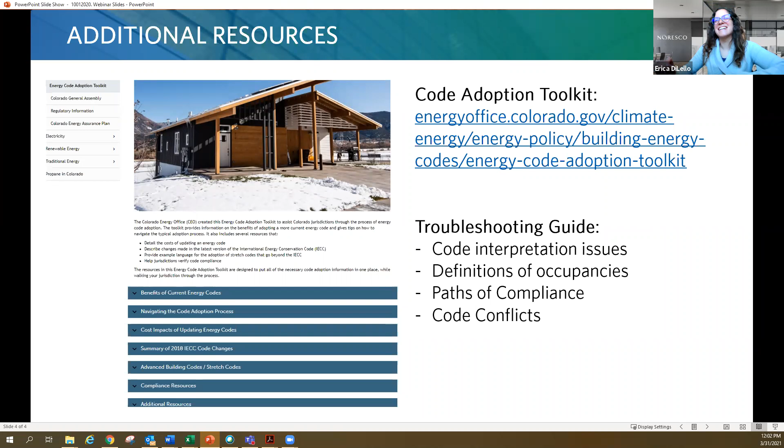All right, that sounds good. Well, welcome everybody, and we're gonna do our level best here to review some reports and all kinds of wonderful stuff that deals with energy. As Erica said, we can answer questions anytime. Pretty laid back here today. I'm going to be looking at several different reports and having some fun. So whatever it is you want to ask, please do.

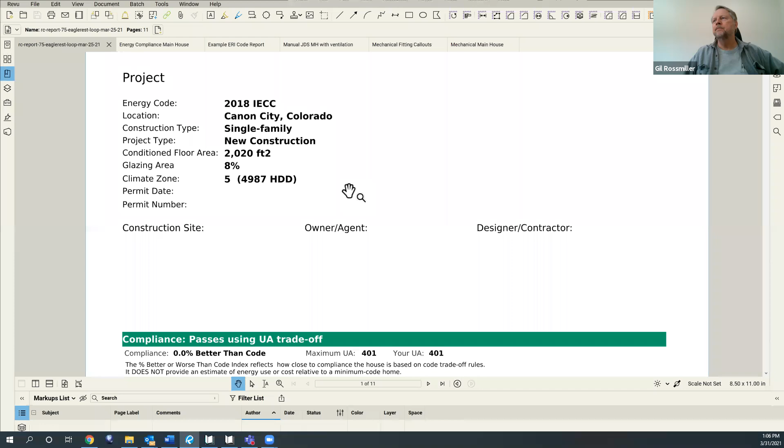These are all, yeah, what is the zone? Well, let's see. I didn't blank out the, I guess I did. Some of these I didn't blank out, keep the innocent nameless or whatever they call it. So climate zone 5. This was down there in Canon City, and this is 2018. So a lot of you come up with it, right? So Kristen's like, ceiling value not enough for climate 7. Well, that's the beauty of it. Great comments. These are really, really good. We'll look at all of that stuff, okay?

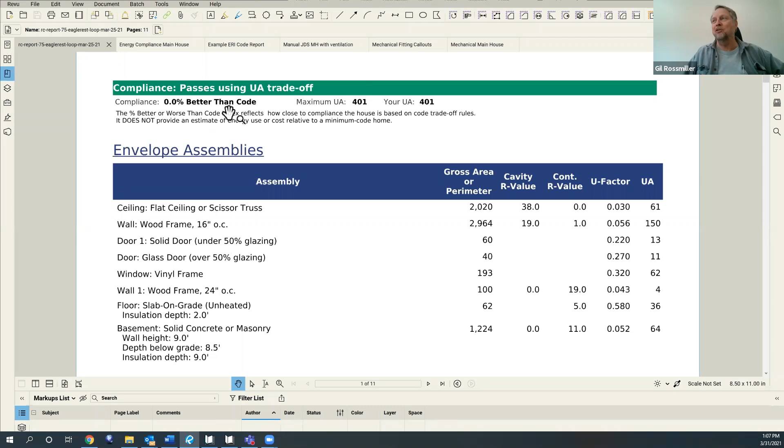So the first thing we have to understand, yeah, Tim is like, compliance better than code. We'll start at the very top. Tim, that's absolutely correct. So it says 0% better than code. This is why it's a good one, because it's got a lot of good stuff on it, and it's small, it's not that big. You will pass as long as your UA is the same or less than what we call the reference house.

Okay, so in this particular case, this is what we look at. It says maximum UA, so that would be if I built a prescriptive house, right off the tables, my UA would be 401. What they did in their design, how I'm going to build this building, they came up with 401, pass. It just can't be more than 401. It could be exactly the same. I know, isn't this great? This is a good one.

So then we start to look at the assemblies and what's going on here, okay? Well, let's look at the ceiling. Now, we had a couple of comments that said, hey, this will never make it in climate zone 7. No, the beauty of it is it might work if they had really good walls or really good windows or had floors that were exposed with really good insulation in there. So what you want to get in the mindset of is making sure that what they're showing on their ResCheck is what they're showing on their plans, not necessarily does it meet the R value prescriptive table, because it may not, which is why they're using the ResCheck so they can trade the stuff off, which is perfectly legal, right?

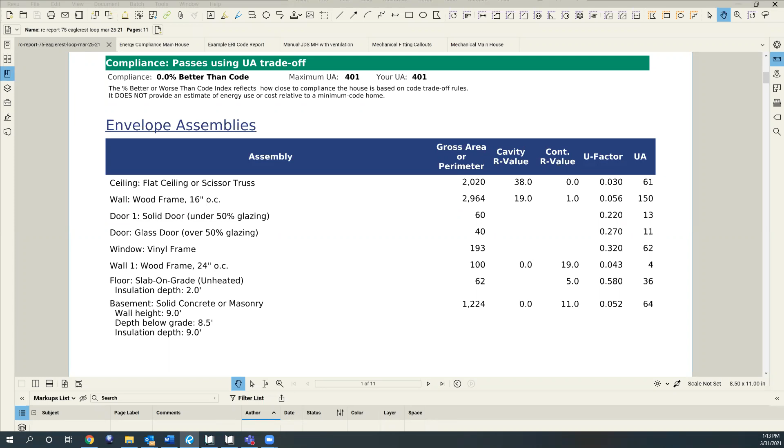But Cornelia, you got your hand? Would you want to say something? I don't know. Can I make it talk, or I don't know. Yeah, I can go ahead and allow her to talk. Cornelia, you just need to unmute yourself. I just wrote some questions in the Q&A. Oh, great. Thanks, Cornelia. Yeah, I got it. So we'll talk about that. I have a tendency to start getting, I'll try to keep on track.

So Bill, you're right. Bill says, in my experience, that R1 is cheating. Absolutely correct. Because the software already accounts for the rest of the assembly. And Cornelia, that's exactly correct. We don't put anything here. So what the software is doing within itself, it is already taking into account any other R values that might be part of that wall assembly, the siding, the wood sheathing itself, that the studs are 16 inches on center,

any sheetrock that might add to the R value, any air films. When you start calculating the overall U factor for an assembly, there are what we call air films on the outside and the inside that have a very small R value that you can use. That is all defaulted in the software. The only thing the software doesn't know is what insulation are you putting in the assembly, and is it cavity between the structural members, or is it continuous, okay?

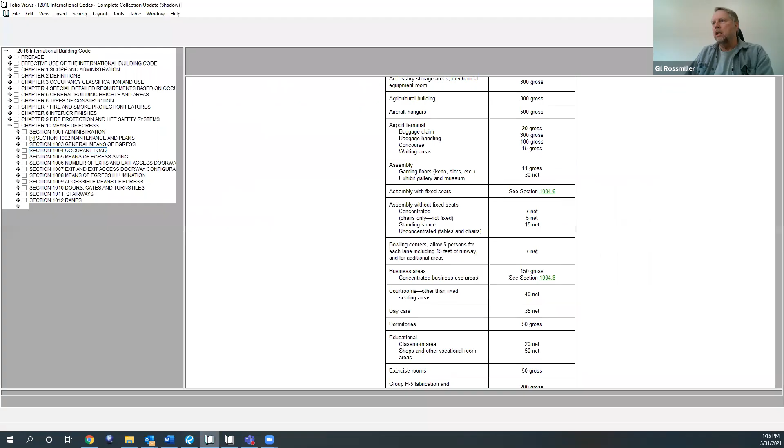So Ryan's put in, could R1 be insulated siding? Yes, it's possible. However, because of the way insulated siding was done, you must then subtract so much. Let's see what that is. I want to say 0.17, something like that, because what's happening with vinyl siding and insulated siding like that is the product R value is calculated using the vinyl siding and the insulation that's in it, and that's not allowed. That's actually two materials to get an R value.

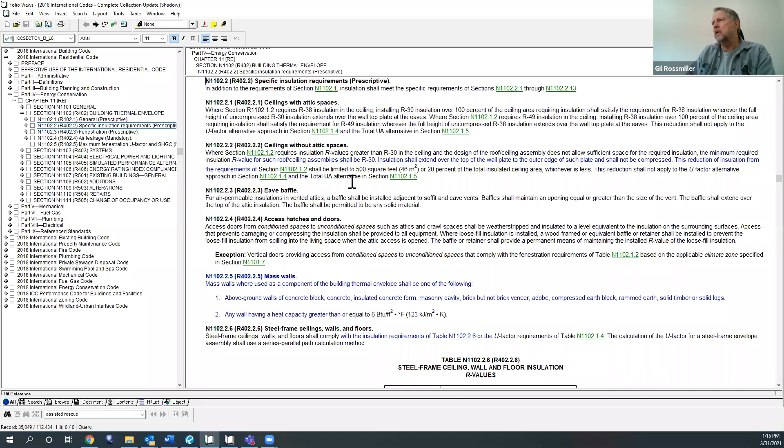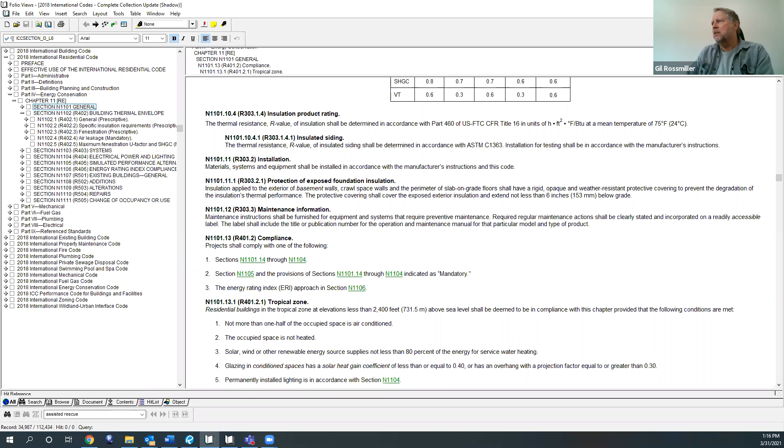So you have to subtract a certain amount, and maybe somebody can remind me where that is, but there is a place that says that. And somebody type in where that is. I'm not finding it. I know it's somewhere. And it was a big issue in the code development process. Yeah, see, here's the insulating siding, but there was somewhere that said that. Perhaps somebody could look that up and get me that section so I don't waste time here. You subtract something and I can't remember where it's at right off the top of my head.

So anyway, let's get to this wood wall. So this is that R1. So you would look at the plans, and what I would expect to see is an R1 continuous insulation over the entire outside or inside.

It could be inside the wall. Nine times out of ten, they're putting that in because they think they should, and they shouldn't.

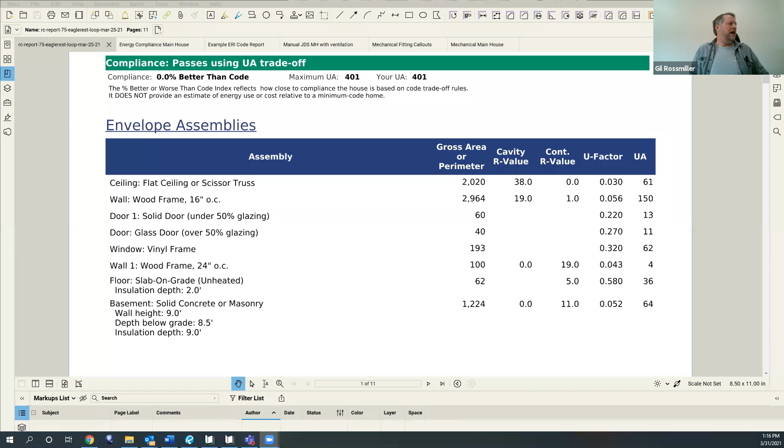Shouldn't at all. So how is the R value for a wood frame wall established? Well, it's going to come from ASHRAE, that's where they get it from. But I can show you a very quick example with a wall R value picture. All right, so this is how it's done. You can add R values, but what you can't do is add U values.

Then we get to gypsum board and the interior air film, and then we add it up. So what you do is there are air films we're talking about. This is a regular old 2x4 wall, and you've got a table with an R value at the insulation, and an R value of what it would be at the stud. The air film on the outside would be continuous, and these R value numbers come from the ASHRAE Book of Fundamentals, that's where it comes from. Then we've got plywood siding with an R value that's continuous over everything, and some half-inch wood sheathing that's also continuous over everything because it's sheathing.

Then we've got a 1-inch insulation board on there, and it's continuous over all the sheathing, so that's continuous over the whole assembly. Then we get to the insulation or the wood stud itself. I've got R13 batt in this wall, that's what it's going to be at the insulation, but that's not what it's going to be at the stud, is it? No, the stud's only going to have an R value of about 4.55 because there's no R13 insulation over the stud, that's the so-called thermal break. Then we get to gypsum board and the interior air film, and then we add it up.

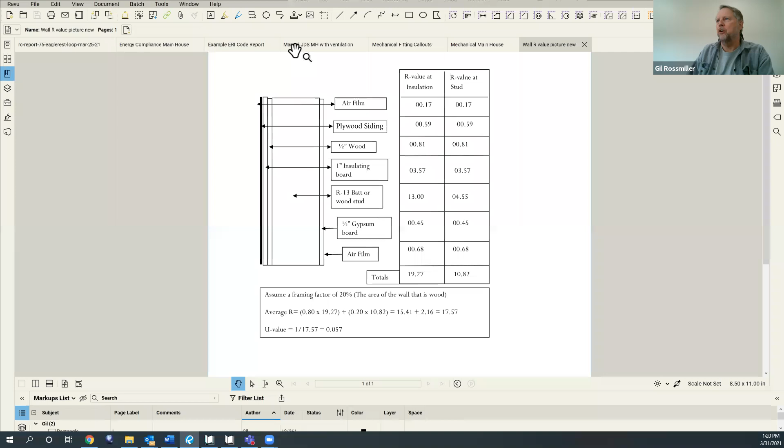R values and U values are reciprocals of each other, so 1 divided by the R value gives me my U value, or 1 divided by the U value gives me my R value. So we do the math: 1 divided by 17.57 equals 0.057, that's how you get the U value. If they're using 'other' in here, and it says wall other, they're going to have to give you that calculation. It won't show a picture like that, but they'll give you a calculation showing how they came up with the U value for the assembly.

So that's how it's done. Hopefully that wasn't too much for everybody.

The other thing we need to watch out for, that Ryan had brought up, was that R19, and that was the other thing I advised on this particular REScheck: what kind of wall are we getting R19 in? Because you're right, R19 batts were never made to fit in 5.5 inches, they're 6.5, maybe 7 inches thick depending on the manufacturer. We don't allow that to get crushed in there anymore, they actually have to reduce it. In the code, we kind of lost that too, it's not in the code anymore. So you're not going to be able to put an R19 batt in a 2x6 wall unless it's been manufactured at 5.5 inches. I personally don't know anything manufactured as an R19 that is 5.5 inches.

You can get an R21, right? You can get an R21 and put it in there that's manufactured at 5.5 inches.

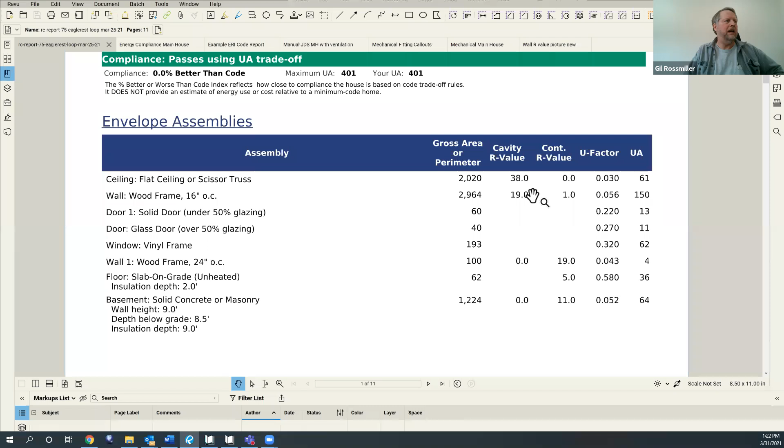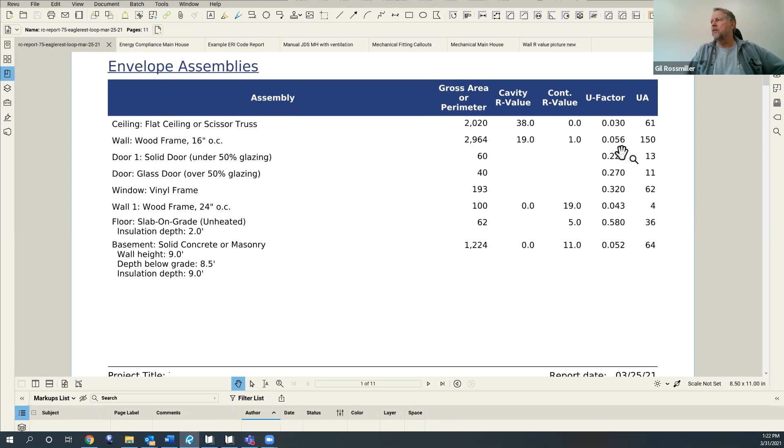All right, so the U factors here for doors, that's just going to be a label, the NFRC label there on the assemblies themselves. Same with windows, we went over that in quite detail with commercial windows. Most of these are going to have stickers on them for what's happening, right?

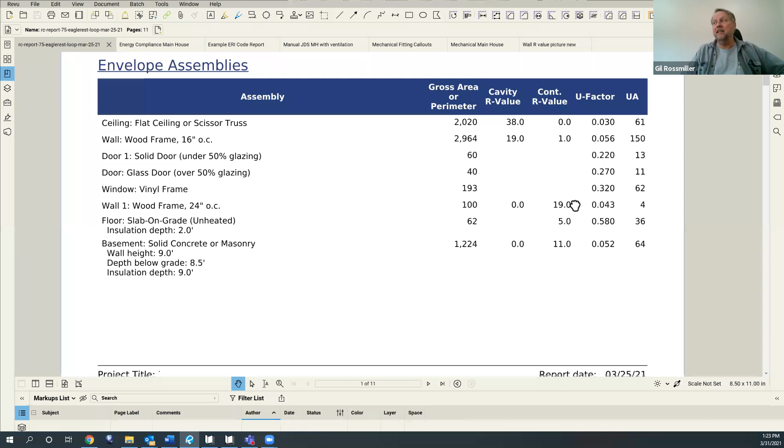And then we get down to this next one. Yeah, somebody picked up, well, what is this? I got a 2x6 wall that's continuous R19. Where's that happening? Great question. You'd have to look at the plans and see, is that really true? Do we actually have that? Yeah, I doubt it. I suspect that 19 number should have been over here with the cavity. That would be my guess. But you have to look at the plans to decide, right? You would have to see.

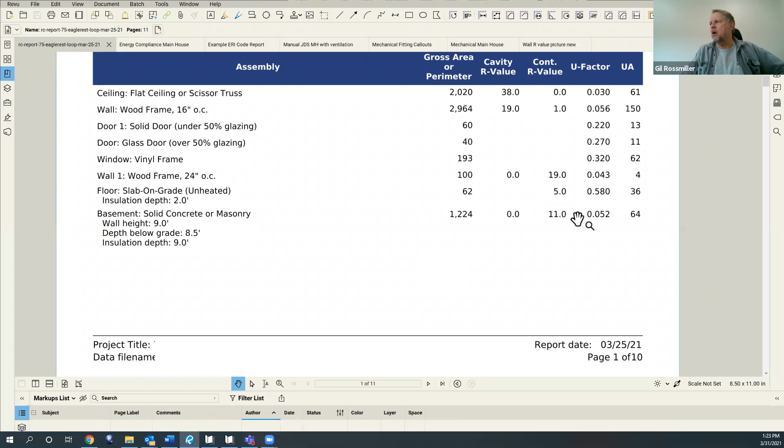Slab on grade, now this again is linear footage, okay? Not an area, it's linear footage to do that. So just verify this is possibly a walkout basement. And then we've got, looks like a 9-foot basement wall, and they're doing an R11 drape because it doesn't say it's furred. So we would just make sure that that's the case on the plans. And if this is the way they built it, if the plan showed me all of these assemblies that exact way, this would pass. It's just that the plans didn't show it that way. And so they will be redoing this.

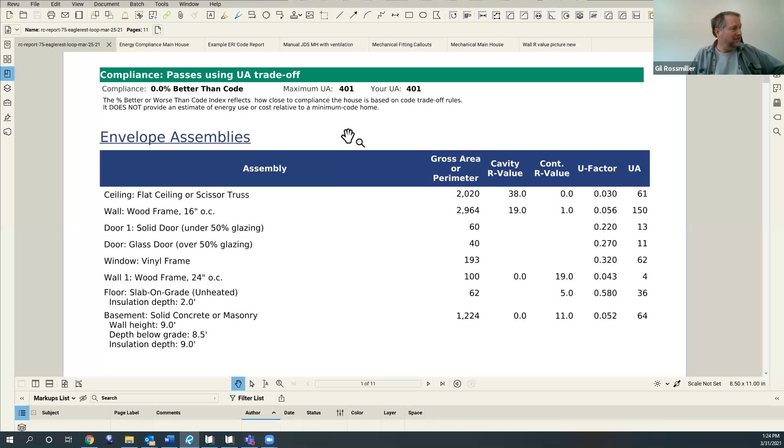Okay, all right, so I don't want to spend that much time on this, but that's okay. So this one, I won't spend a lot of time here. This is the same kind of thing we looked at the commercial piece. It's generic, it's not project specific, so there are going to be plenty of things here that may not apply to a particular project.

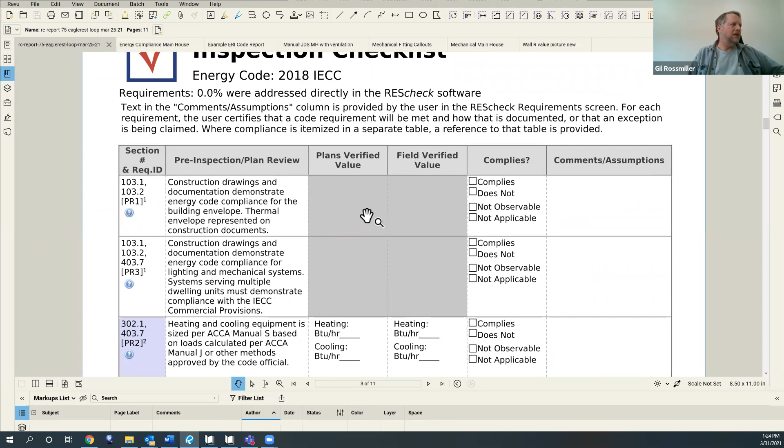Okay. So you can see here that 0.0% were addressed directly in the REScheck software. So clearly the designer didn't check boxes, add any comments, which is nice if they do. But again, you just go through and it talks about all the things.

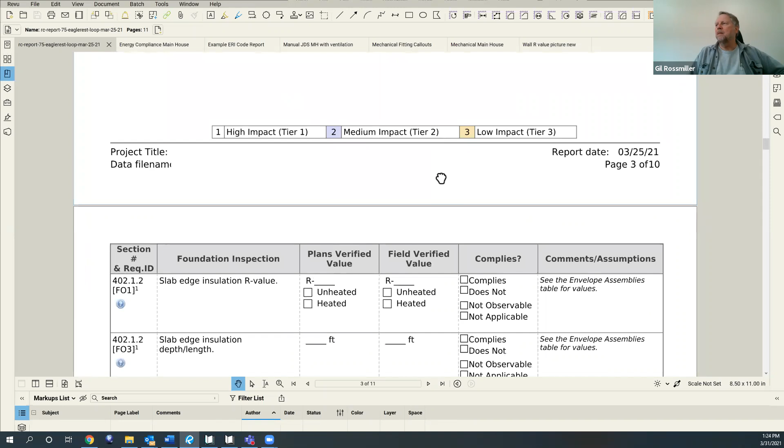So the white ones here are number one. If you do nothing else, would you please at least make sure this happens? Then the blue or whatever that color is the next, and then, I don't know, is that green? Goes down to number 3. So anything that's got this white, that's a number 1. If we do nothing else for plan review and inspections, that's the thing to do.

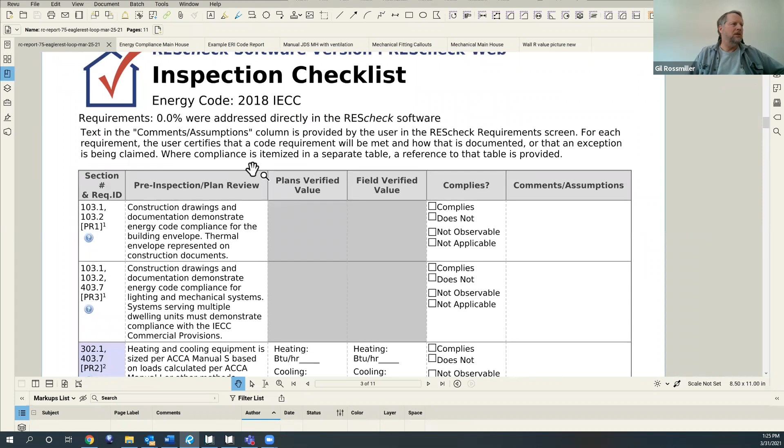So we do the same thing here in REScheck that we did in COMcheck as far as these inspection checklist pieces. You as a jurisdiction need to decide, am I going to tell these guys they have to fill this out? Or are you okay with that? I got jurisdictions that do that. Okay, that's completely up to you.

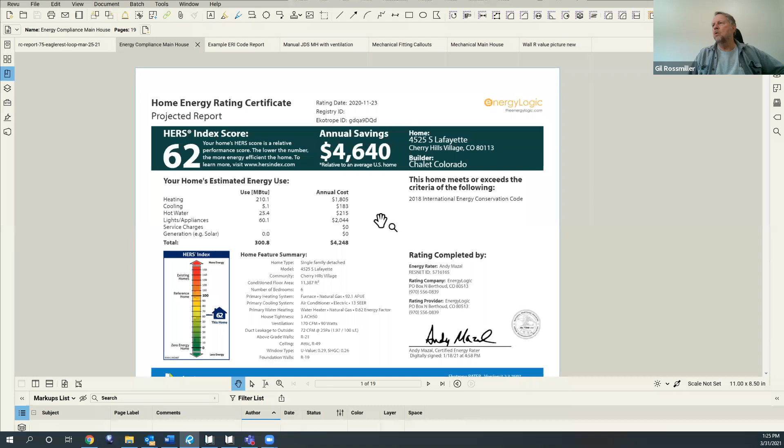And so now, what is this? Oh, okay, so this would be what we get in theory for a performance house, okay? And so here we've got this really cool certificate here, it's a projected report. So what we're looking at here is something that you would get during plan review, okay? This is something that still has to be tested, and this is important to get during plan review to see if it's anywhere near possibly passing based on performance.

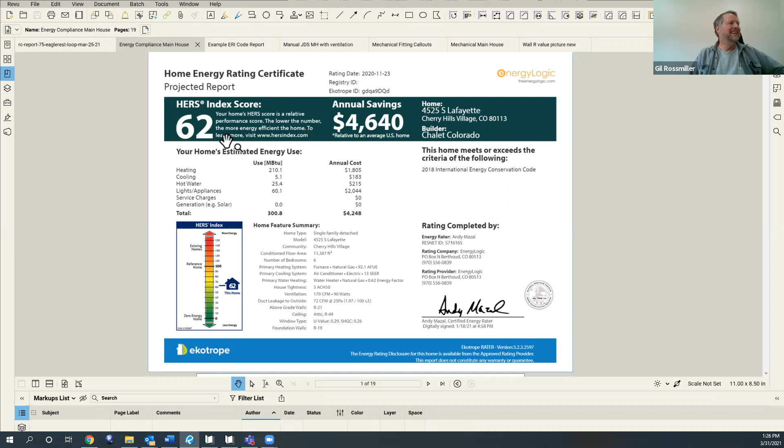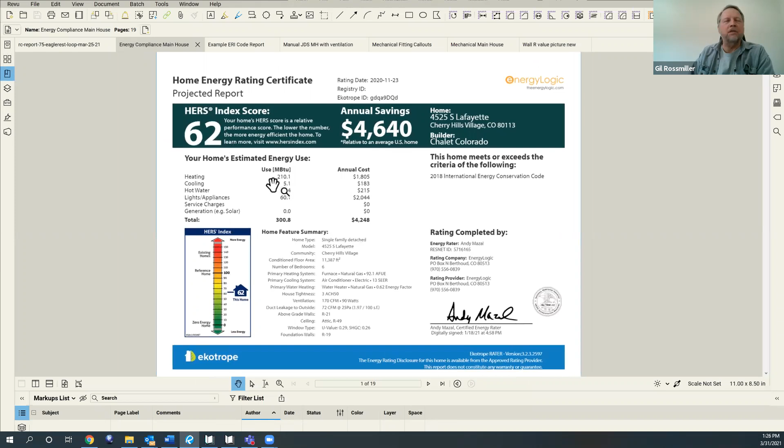This number here, this HERS index score, we don't care what it is. Yes, and we will get to that very thing, Ryan. We will show you what an ERI report looks like, and it looks somewhat like this. How's that? Yeah, I will show you what that is, but it's not on this one because this is performance, okay? So every one of them will start out like this - HERS index score, we don't care what it is. This 62 for a HERS score, home energy rating system, means nothing to us code officials. Nothing whatsoever in this day and age.

What matters is this stuff. If I got it big enough for you, let me know if it's not big enough.

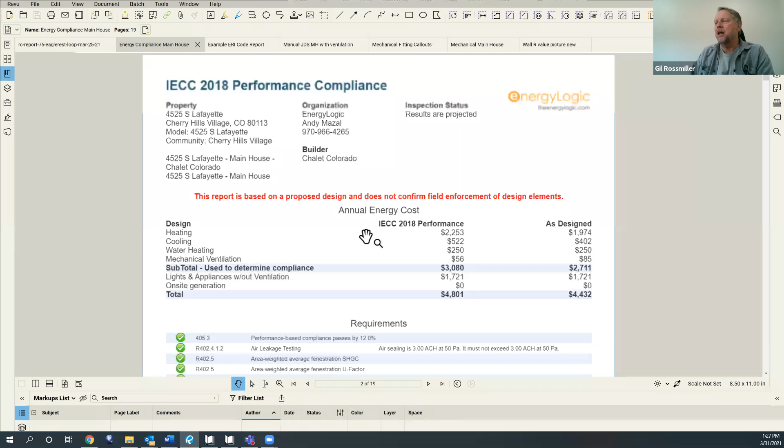Okay, so what we're looking at, this report is based on a proposed design, does not confirm field enforcement compliance of the design elements. So clearly, this is just what they propose to do.

This particular rater, this company, will actually do inspections to verify what they need to verify for the performance piece, which includes blower doors, insulation installation, air barriers, and all kinds of stuff. What we're here for is used to determine compliance because it's the mechanical heating, cooling, domestic water heating, and the little bit of energy it takes for mechanical ventilation. That's what we're looking for in performance.

So what we're looking at here is what we're calling the reference house, which is a code house. Here's the way they actually built it, and the costs for those items. If this number here, 2,711, is less than 3,080, we pass.

Okay, this is the performance path. All the different requirements are going down through here. So this is one of the things that we do worst case.

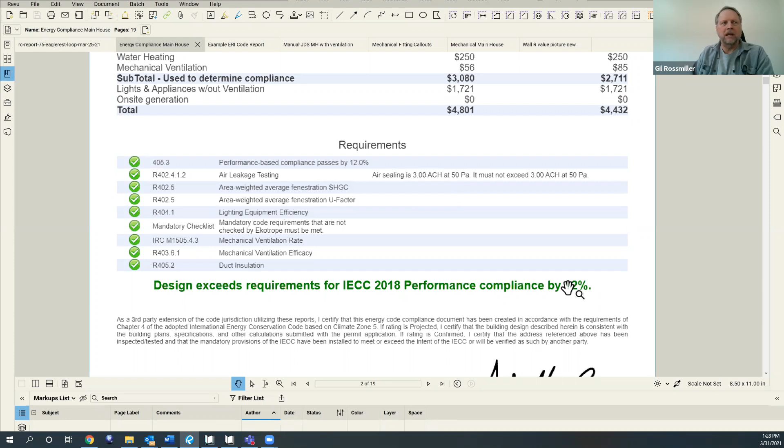They're saying it can't be any leakier than 3 ACH 50, because this is in climate zone 5. We don't care how much it passes by. Again, this could pass by 0% and would pass code. Same thing as a REScheck.

So again, this is basically the thermal envelope. They might actually get a little bit better because most houses are testing less than 3 ACH 50, so that'll help them out.

Okay, so Jeffrey says, why does the HERS rating matter and why is it there? Well, that's a great question. And for some reason, my questions aren't just popping up on the bottom, I have to page down, so I apologize.

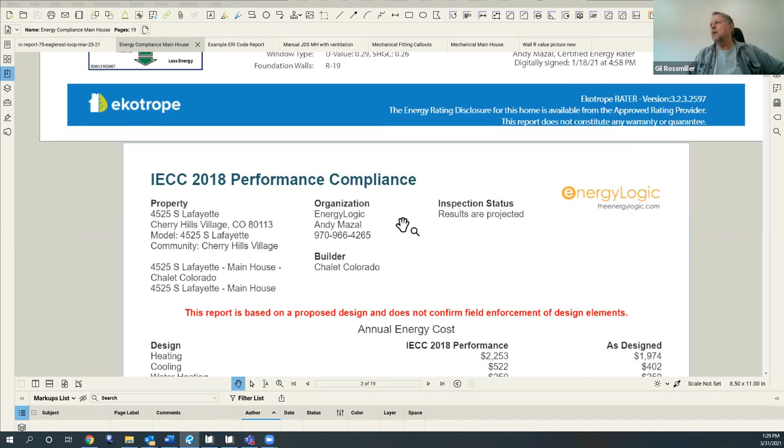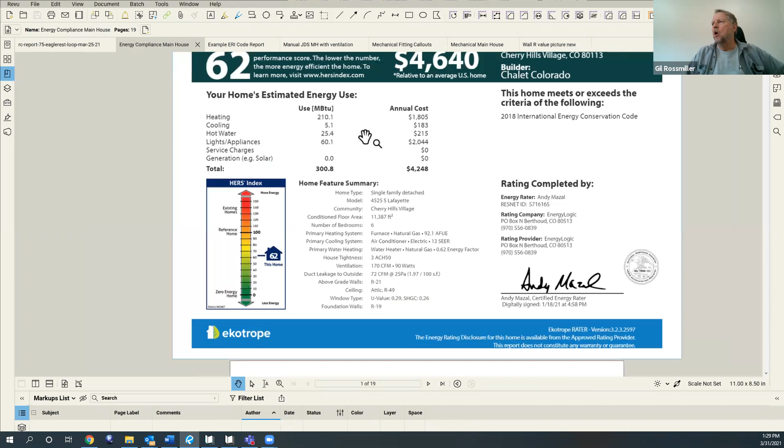So this is all about marketing. This is a marketing piece. This is when they explain to the homeowner, rather than getting into all the code geeky stuff, hey, if I were to build a house -- what we call this reference house, this is a 2006 house essentially -- how much better is it?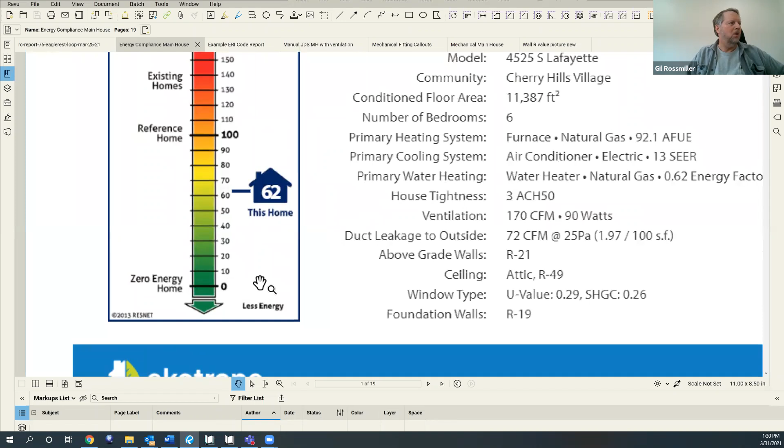And the lower the score, right -- a 0 on a HERS rating is a net 0 home. So what we're looking at here is just a marketing piece, that's really all it is. The lower the score, the more energy efficient your house is. And what did your neighbor get? Well, my house was a 58 and your house was a lousy 62. Whatever. Again, it's all based on marketing.

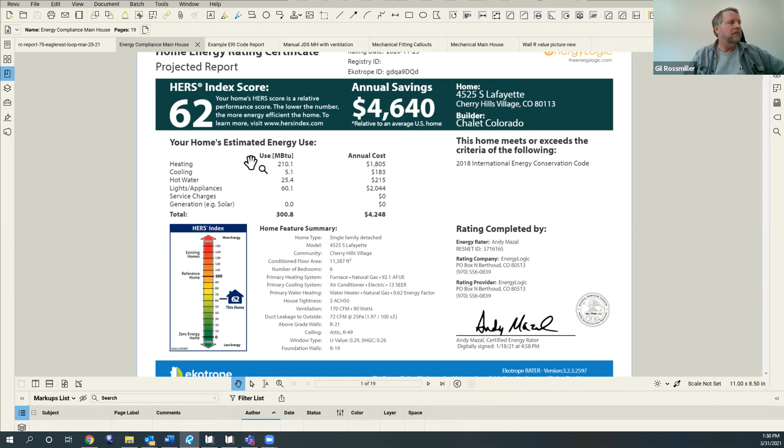There are some scores that deal with different programs that are out there, like Energy Star House -- you'd have to get a certain score. So this is just a feel-good number for marketing, that's really all it is. Good question though, Jeffrey, good question.

So what we're looking at here then is not so much this wonderful, nice, cool little certificate. However, what we're making sure is that these values here -- 49 attic, 21 walls, 30 framed floors -- looks like it's either a walkout that didn't provide insulation or they didn't have any slab on grade. We'd have to look at the plans to verify that. ACH, 3 ACH 50, and then is this where our window values were at?

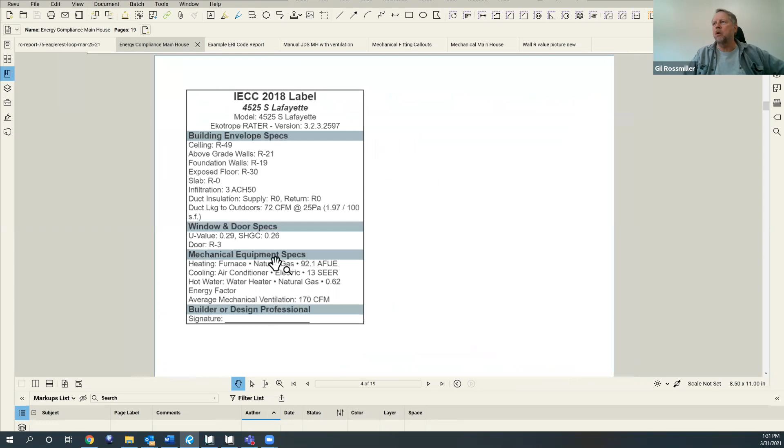So all we're doing now is looking at the report that spits out this little label -- if you want to see the label -- is what's happening in the house and is it correct based on the construction plans you're given.

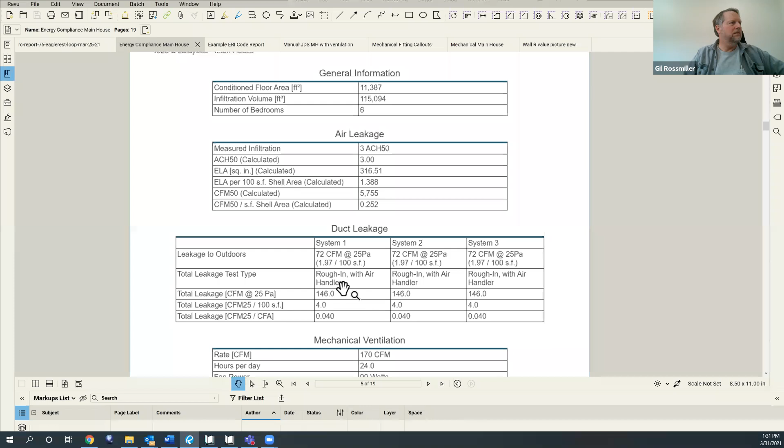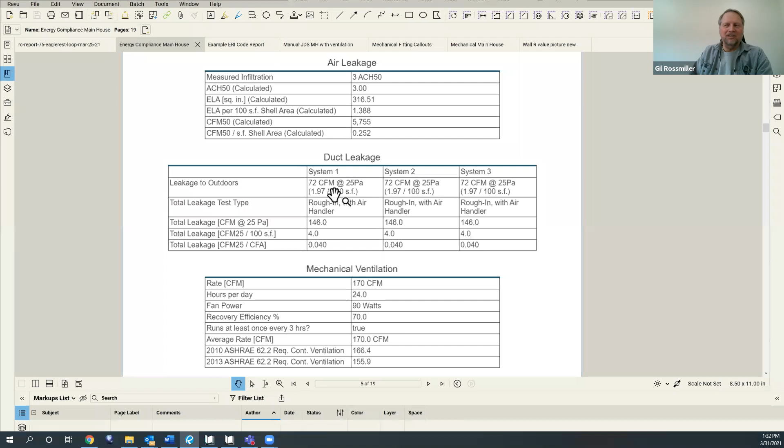So this is a healthy house, over 11,000 square feet. Yeah, it's a healthy house, okay. And then it starts to say, okay, what kind of systems do we have? Well, this one had 3 HVAC systems. And this is just what they're speculating is the worst that the leakage to outside could be. So it's all worst case when they're looking at guessing, from what I call a from-plans rating. It talks about what the CFM is going to be.

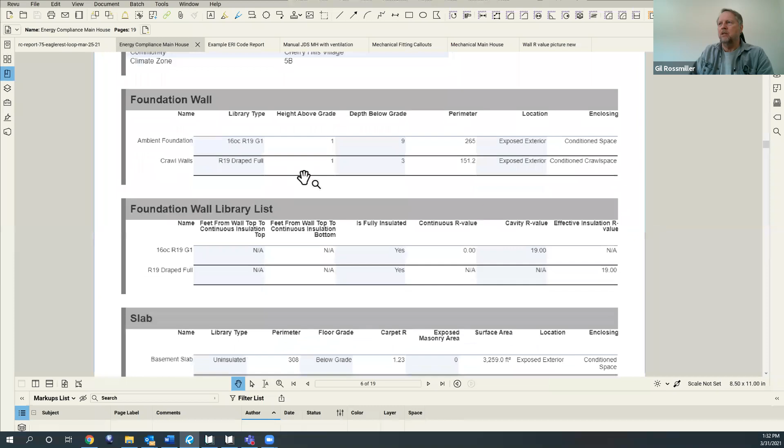This one actually is putting in an ERV, or excuse me, an HRV. They're saying it's 70% efficient. It is. It's a pretty nice one, okay? And the amount of air that's coming in kind of gives us a general idea of what the building is. And then we start to get down into the details of what has actually been put into the software to calculate that energy savings that we looked at in the very first couple of pages there, okay?

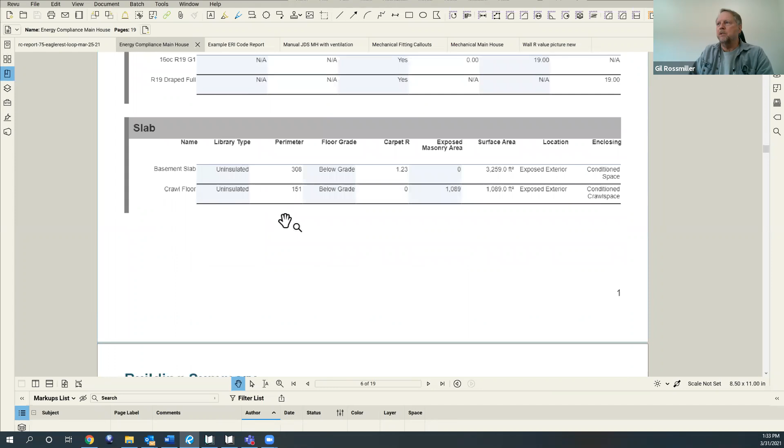What we're doing now is, hey, is it a crawl space? Did they put in R19 drape all the way around the outside? They're saying, hey, the slab is uninsulated, below grade. You're not having any kind of an R value there. And we just start going through all the different pieces that they said. So here, the rim joist is going to be an R21. They give you the surface area of it. Personally, I don't calculate the area of a rim joist. I just make sure, right?

Yeah, right. 11,000 square feet, that'd be a fun blower door test. Yeah, no kidding, huh? Yeah, well, they'll be doing it. I can guarantee it.

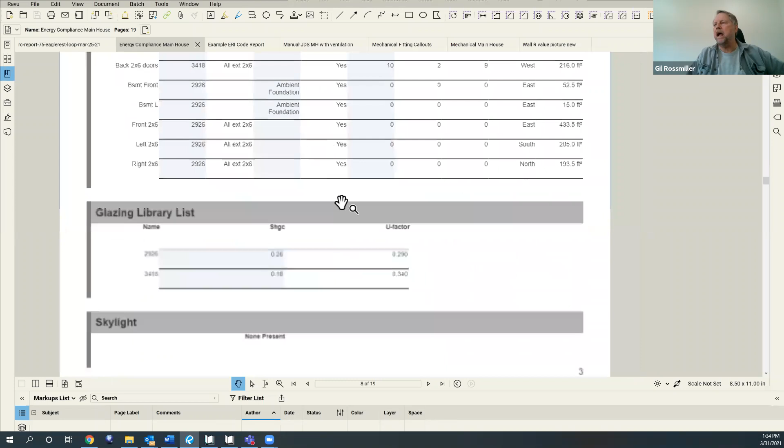Yeah, so exterior walls, right? It says R21. They kind of get into the surface here if you want. So you just literally work your way through all the different stuff, the glazing, the glass. That's it, right? And we're just verifying what's there. That's it. Yeah, it's easy. It's a piece of cake. Well, it takes some time. It's not something that happens in 2 seconds. Yeah, and here it's saying the attic and any vaults is going to be an R49. Okay. So literally it just goes on page after page after page.

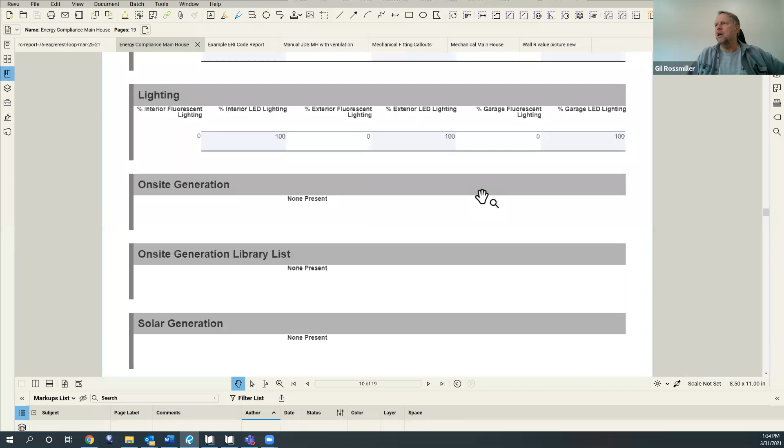It's going to have blower door test, right? And here's that ventilation coming into it, right? You can verify if you want to get right down to the nitty gritty. Was the HRV 90 watts? Is that what it is? Did they give you the cut sheets on it? Verifying that what they're putting in lighting is 100% LED. That's what they're saying. Everything's LED. And then we get into generation that they're not having here. We'll get into that a little bit.

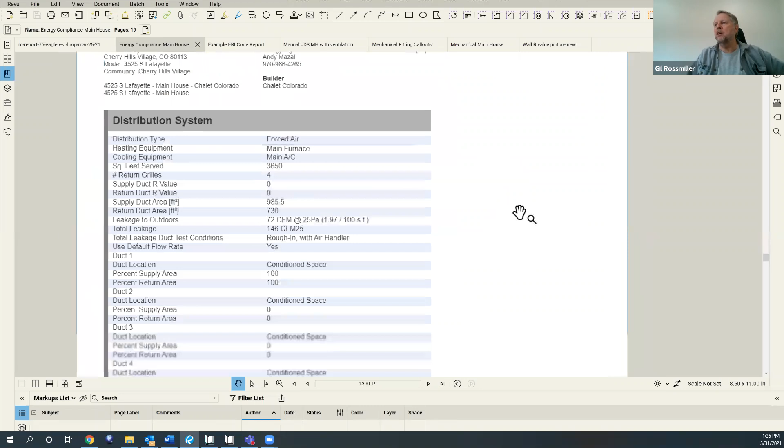But here is the conditioning equipment. And you think that makes a difference in the calculation? Yeah. What's the efficiency of the different units that they had? Does it match what the plan said? So here it is, right? The size of the equipment, does that match our Manual J? Is everything kind of copacetic? Because this all makes a difference in what the heating and cooling costs are. It's based on the efficiency of the equipment. You bet. Anyway, it goes on, distribution equipment. I think you get the idea. We're just trying to make sure we got apples to apples. Here's the second furnace, and there'll be a furnace 3 here.

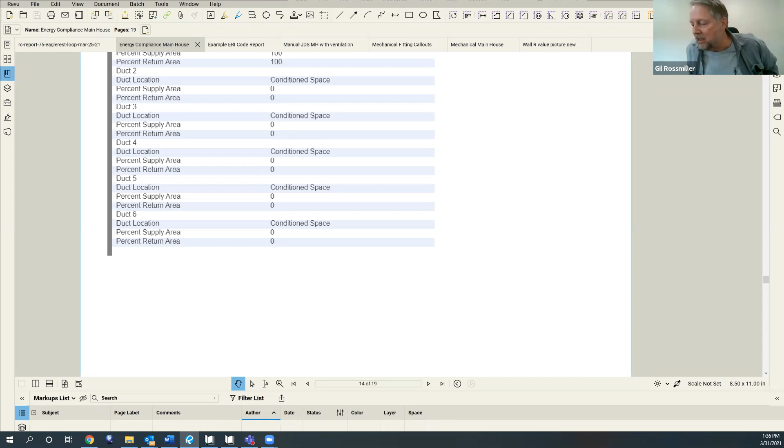HERS is more than marketing. Bill's saying it's required by Energy Star and DOE Zero Energy Home. Yep, that's what I was saying. You got to do it. Boulder has a code requirement based on the ERI, which is very similar to HERS, and we will look at that. Yes, we will look at that, absolutely. But you're right. If I'm going to do a net zero energy home for Department of Energy, it's a requirement, and so it is with Energy Star. And what are those? Those are both marketing. It's a great marketing piece. We're not only an Energy Star home, but we are a DOE zero energy, net zero.

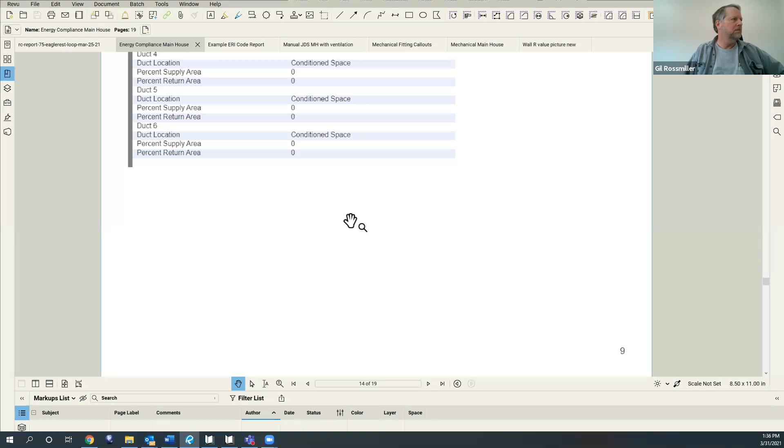What is it? Zero energy something home. I can't remember what all the acronyms stand for. Oh, ready. It's a zero energy ready home. So you've got a thermal envelope and things that will actually provide net zero if you add solar and things of that nature. Okay. So you're actually right, Bill. But it's all marketing. It's not a code requirement. In some jurisdictions it is, like Boulder, right? Most places it's not. Okay, so we're going to move in. So here's that ERI. So here's an ERI. Okay.

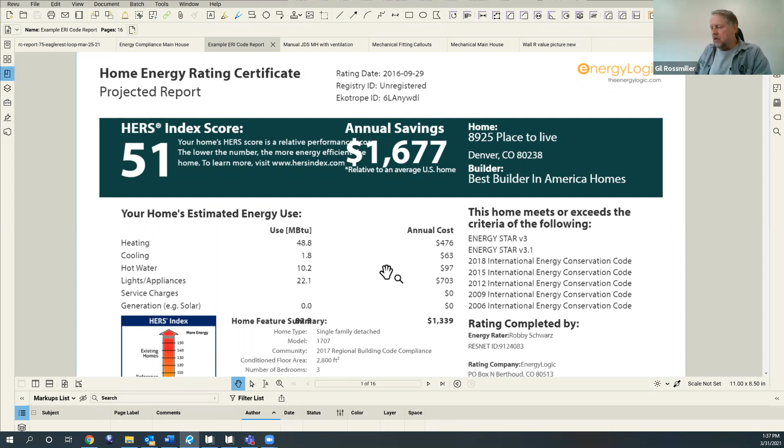Well, it first tells you what the HERS score is. I don't care. Yeah, look, Boulder requires a net zero energy ready home for any over 5,000 square feet. Well, this one would qualify, I'll tell you that. Yeah, they'd be putting a lot of stuff in there to get to that net zero ready home. Absolutely. So again, we don't care what the HERS score is, because this is my ERI, and that is what you're going to see.

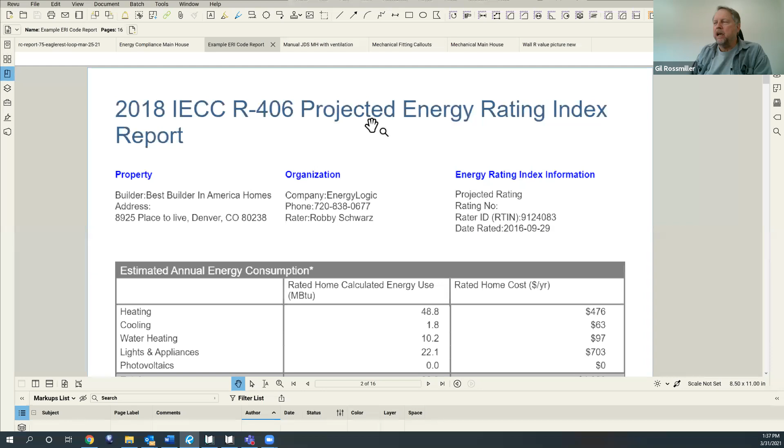Right? Projected energy rating index report. Okay. Again, this will now have, what is it? Well, this is taken up a lot. Okay. Then the code, we need to know, is it with photovoltaic stuff or is it without? And then this one clearly is without, right? Because it's the same score, right? If it was with PV, that score would certainly be lower.

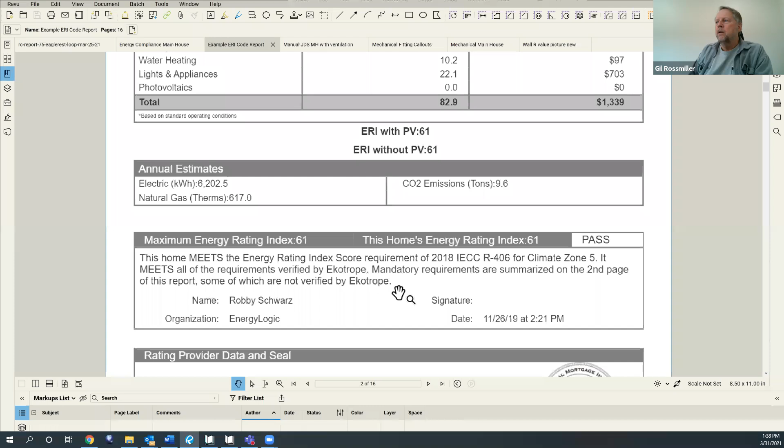Okay. And then we start to look here, right? And what does it have to be? Well, in order to be able to qualify for an ERI based on my 2018 code, it would need to have an ERI score of at least 61. This has a 61, we pass. Okay. Now, I don't have the thermal envelope report along with this one, but it would be the same thing. So what we just looked at for the performance path of all the different walls and U values and all of that would be in the same report.

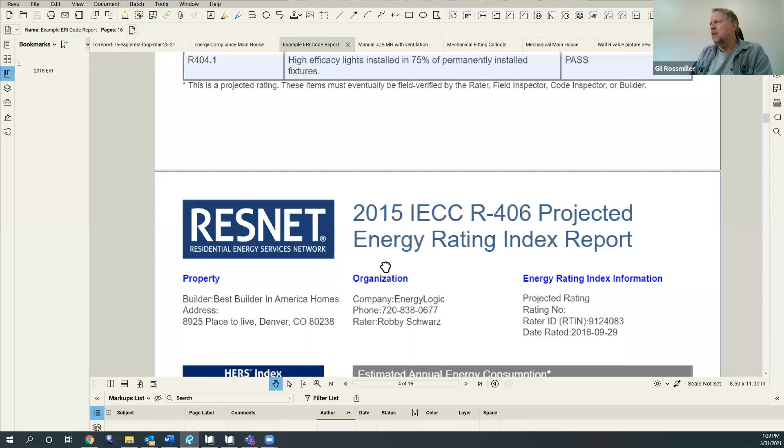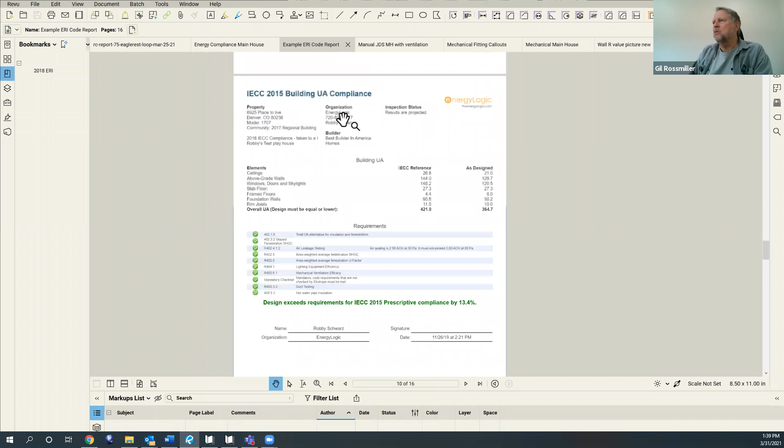I think this one also has, no, just the ERI. Now the other thing that's interesting, you don't see very often, let me see. I'm sorry, I'm going to make you dizzy so we can get through it. Here's something else you don't see very often, but works, okay? This UA is the same thing as REScheck. It's just that the software can spit out the same thing, okay?

Sometimes, it doesn't happen very often, but sometimes you might get a performance report in the very beginning that says, yeah, we're going to do performance. And then the report you get at the end isn't a performance report. It's a UA compliance report, or they're using this software to show UA in plan review and in final. Either way works.

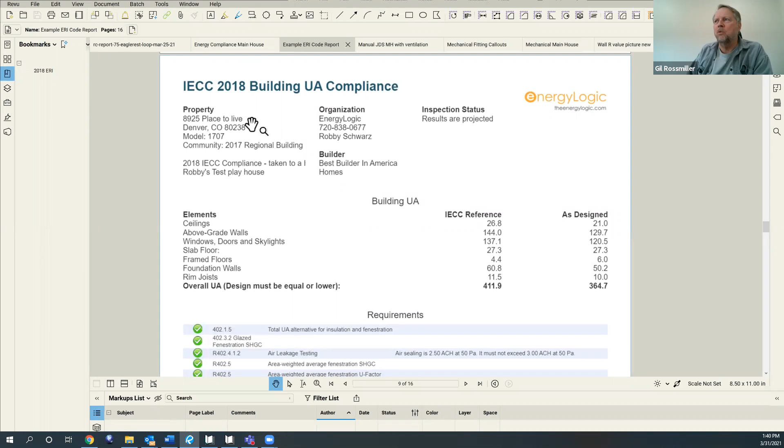The problem is that the ones that started out as performance, there was some issue somewhere. And when they finally did a final rating, it didn't pencil out, didn't pass. It may pass UA, but it didn't pass performance. Okay, so you can do it lots of different ways. I just wanted to point that out because every once in a while you see this from this Ekotrope software, which seems to be the software that a lot of guys are using these days.

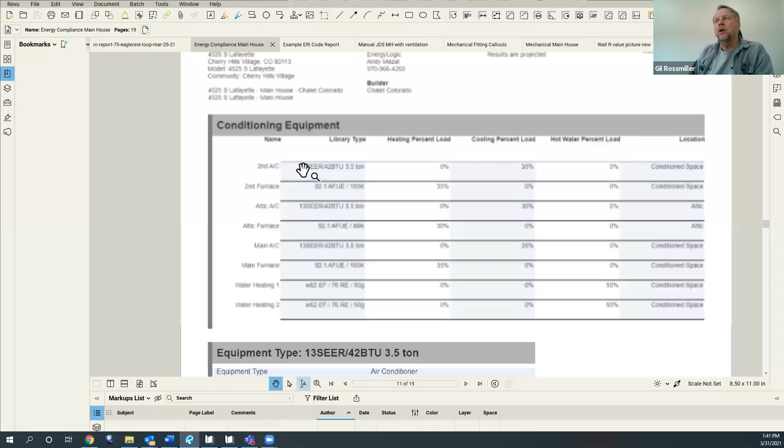Okay, so how about, let's see, we want to get to here. What did I want to do first? What's this? Ventilation. Okay. All right. Oh yeah, I wanted to go here. So you remember this piece that we just looked at? This is the one we were using, right? R21 walls, right? And all the wonderful fancy equipment and all of that stuff, okay?

This is the Manual J. This is the heat gain and heat loss for that same exact house, same one, okay? So now we're kind of talking apples to apples. And so I'm going to hear it said, wait, REScheck UA isn't performance. We've seen that confusion a lot. You're right. However, Ryan,

if, so I'm saying if, and it's happened, someone during plan review, okay, sounds good, Chuck.

So if during plan review they say, we're going to do performance, and we get that from the plans rating and yep, all looks good. As long as they build it this way, we're good. Well, then they build the whole house and the guy comes in and he does the rating and the compliance and it doesn't pass performance. Oops. Now what do you do?

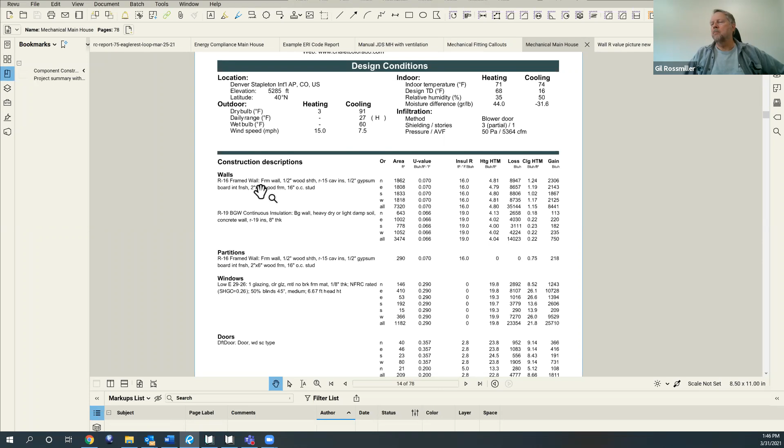Yeah, anyway. So yeah, the big thing here, when you're looking at this, number one, heating design temperatures, right? 3 and 91, is that right for your jurisdiction? Construction descriptions, right? Are they even close to what the construction plans say? Or in our case, we had that performance report we just looked at? They all need to coordinate. They all need to say the same. Is the dry bulb temperature correct?

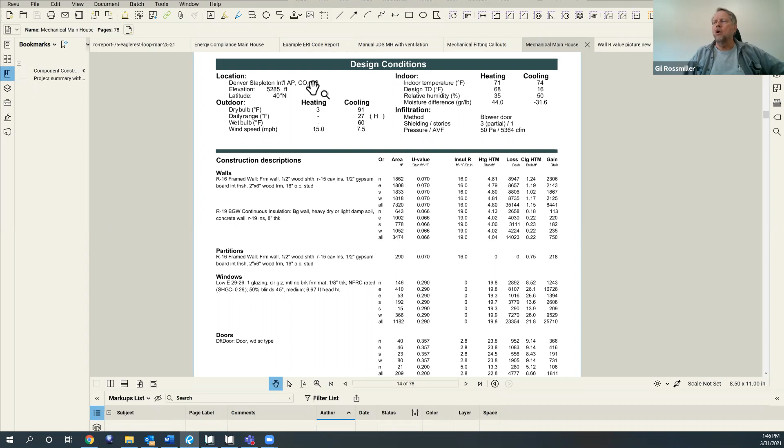So Anthony, dry bulb, depending on the jurisdiction, Stapleton, right? When you go into the software, you can find, depending on the weather data, there might be 5 or 6 Denvers, okay? All going off different times that the weather was taken. So 2009, 2015, right? Was it DIA? Was it Stapleton? Okay. The idea here is to pick whatever the jurisdiction has adopted, and if they've adopted something different, something that's not default in the software, you can change this. The designer can change it to whatever it is that you said.

So instead of 3, it's supposed to be -1, as an example. These numbers will just turn bold, and if they're bold, that means they've just changed something that's a default in the software. And in your case, if it's supposed to be a -1 and it says -1 and it's bold, then it's okay, because it's supposed to be -1.

Indoor temperatures, right? I don't get bent out of shape if they're a degree or 2 here, but technically that should be 70 degrees and 75 for indoor, okay? A 1 degree here and there is not going to affect the equipment. Room to room flows maybe a little bit, but it's not going to affect the equipment in any way, shape, or form, okay? Okay, so that's really very quick on that.

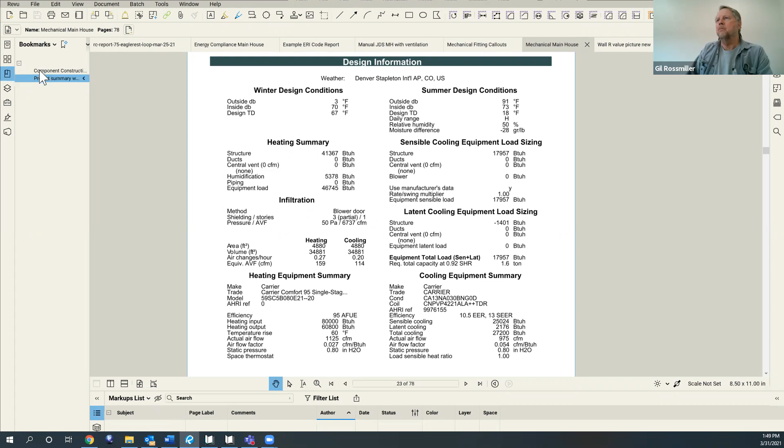We're going to look at central vent here. That's our ventilation piece. This one decided they were putting in a humidifier, and if they're putting one in, more power to them. What we don't want to have them do, though, is here. I missed this. Oh, bad. Very bad. Yeah. See, Gil's not infallible. I don't want them to design for more than 30% if they're putting in a humidifier for winter.

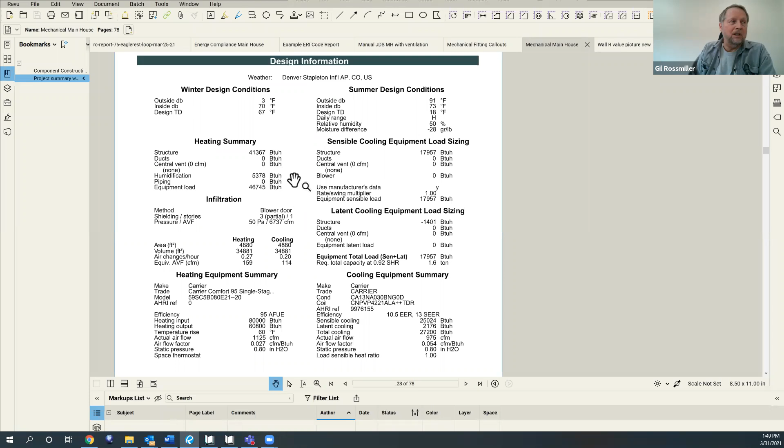35 is, I'm not going to lose a lot of sleep. I'll let myself go on the fact that I didn't catch this. 50% for cooling and 30% here. We just don't want to have condensation where it shows up. I probably will just make a note the next time the guy submits and say, hey, let's not do more than 30%. That's actually in Manual J as a recommendation, it's not a code, okay? But I think it's a good recommendation.

Then we end up with our equipment loads, and here, instead of average, a lot of times I'm showing you guys average infiltration, they're actually using blower door, because they're going to do a blower door test, and they've done enough tests on these places where they figure, hey, we're in good shape, and that's the leakage rate we're going to have, and that then relates to the infiltration number here. You know, how much CFM is being brought in for that.

Yeah, I mean, this is just one of the systems in that 11,000 square foot house, and it's the size of most houses at 4,800 square feet. Yeah, so this would be just like one place. Okay, running out of time. I need to move on.

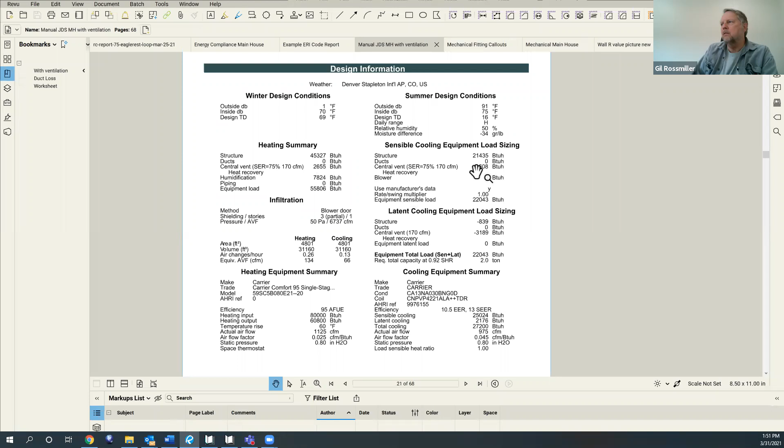So here's one with that ventilation. Just another zone in that same house, but this is where they put the HRV. And so we're putting the central vent here, and it's heat recovery, because right now it's bringing in 100% outside air that's unconditioned, right? And it's recovering 75% of that heat and cool. And so the system itself doesn't have to work as hard to reheat or cool that air. So it's really nice. So this is good.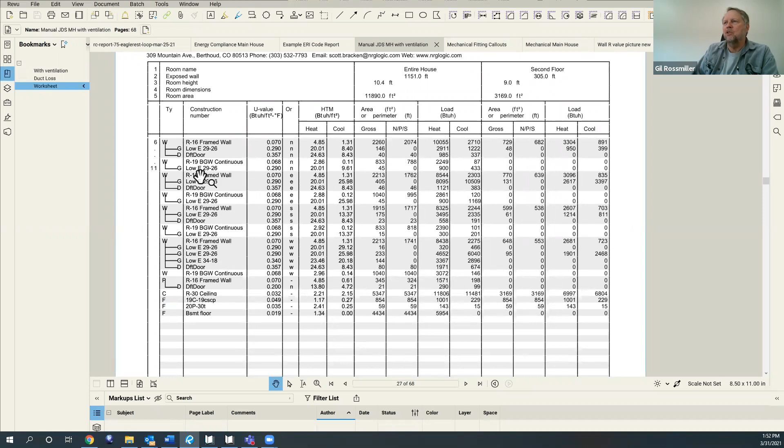Heat loss, heat gain. And then we get to this little worksheet piece. This comes with it. The nice thing about this is you can look down here because it'll give you the entire house. This is all gobbledygook, just stuff that we looked at, the construction components. This is just what they call these things; they just give it labels. But the nice thing here is it tells you what the gains are.

So they're saying that this house has got 12 people, and believe me, that is quite possible. That's right. We actually get into appliances. And for a house this size, 6,400 is not bad. Usually we see something a lot.

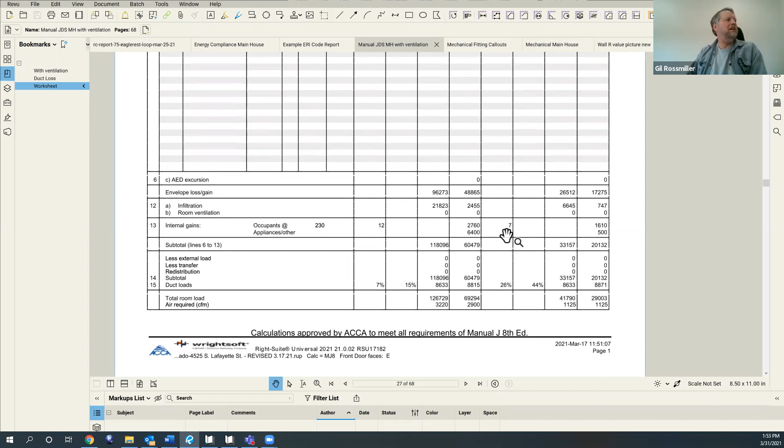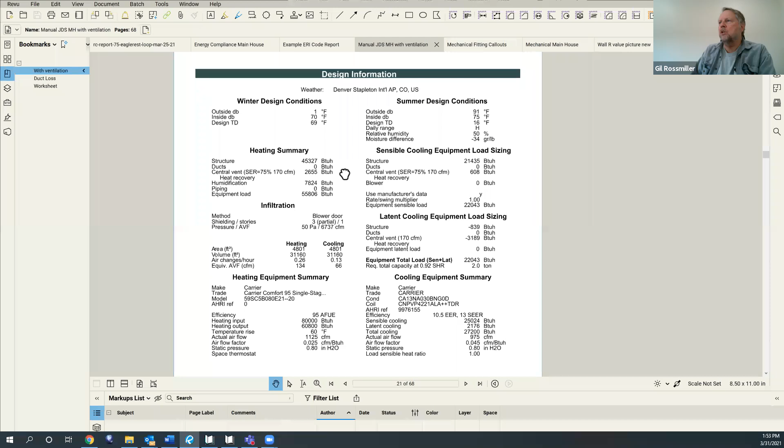Stanley says, what's the bottom line? Pass/fail when data mining, in particular, what percentage range is acceptable? You've got an excellent question. There is no percentage and there is no bottom line. That's about as honest an answer as I can give you. Best thing to do is make sure the dry bulb and wet bulb temperatures for winter and summer are in the correct spot. You're in the same place in the country that you're supposed to be.

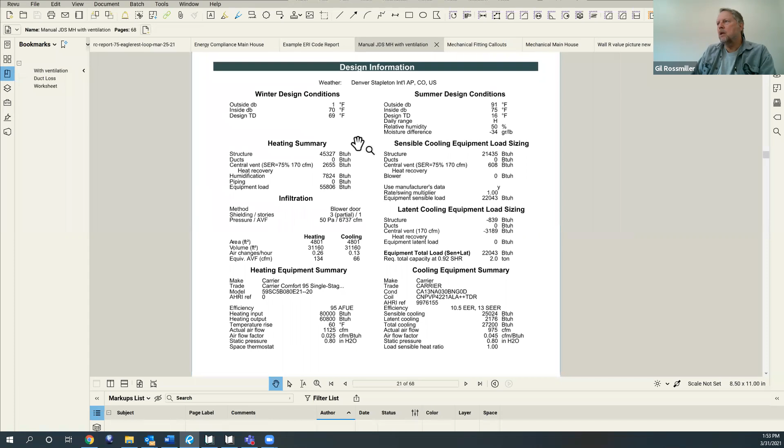And all of those descriptions that we went through are correct. Areas are correct, U values are correct, R values are correct. That's the best you're going to be able to do. I mean, that's a whole day's conversation. There are lots of things that will make these fail. Bottom line, if any of these are wrong more than a couple of degrees, we're done. The rest of it's gobbledygook.

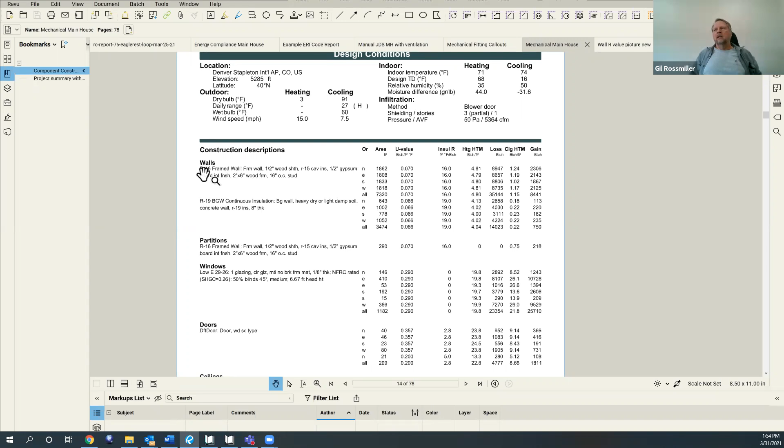The construction components piece that we looked at here, this one, instantly wrong, because the plans showed R21 and so did the performance report, said R21. So instantly, I'm not spending any more time on this one, it's wrong. So yeah, just looking for key components without going down the rabbit hole. Those are some key components right there, Stanley: design parameters, wall construction, the building thermal envelope itself. Those are the big ticket items. Is it anywhere close in the square footages? Good. Glad that helped.

So how about Manual J, or excuse me, Manual D, do we have a duct layout that actually gives us what the fittings are?

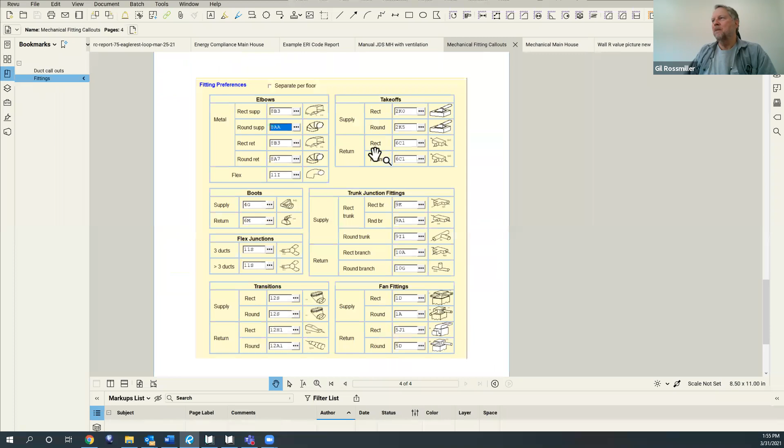Yeah, what's a 2K? Does it give you a picture? This is just a picture of the software. This works. What does that look like right there? Could you relate to what that is? Somebody tell me what that is. You got 3 minutes. What does that look like right there? Any guesses?

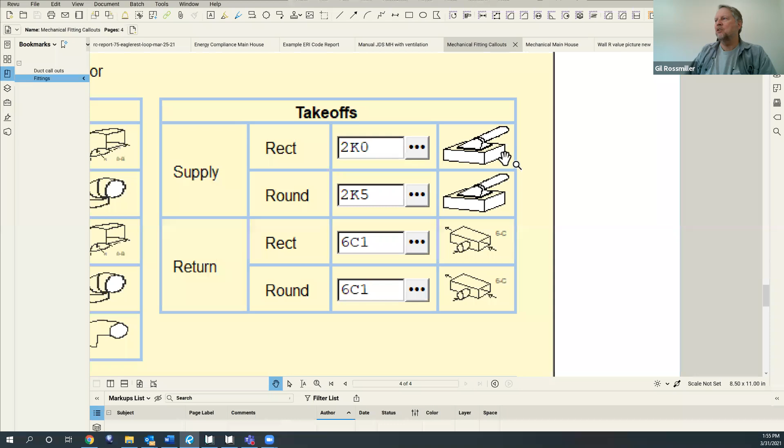Well, how about that? This one usually is really long. And this comes off the top. Yeah, it's a takeoff, top takeoff. That's exactly right. Yeah, when was the last time you saw a takeoff like that? It is huge compared to the duct. Well, that's what this designer used to make it work.

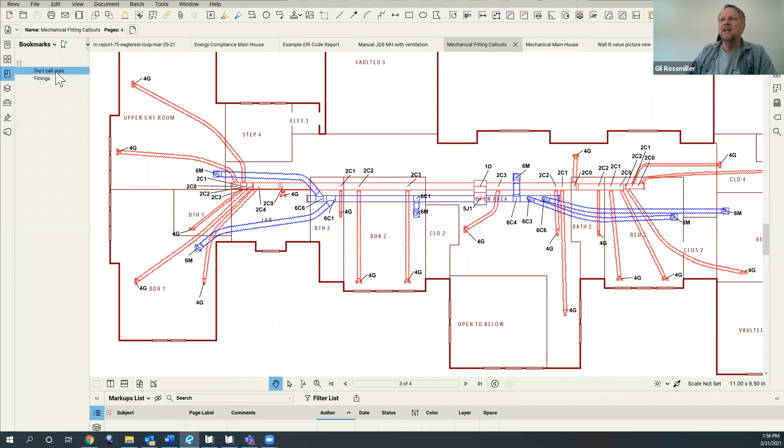Because I'm telling you, the friction loss or the total equivalent length for something like this is a whole lot shorter than something like this. That's why I think it's important. Whenever I call, I say you have to have the fitting numbers and you have to have pictures of them. Otherwise, I can't make heads or tails out of it. All right. Questions? Okay, we're getting to the end here.

Well, I did the R value picture and I did it with ventilation. Okay. What else? Okay, so here's something to point out. So there really is no difference between a 2K0, a 2K1, and 2K3. It's a great example. It's all the same fitting that we saw, that 2K. What this means is how many are downstream? Okay, so how many takeoffs are downstream of this one here? Well, none, because I did a trunk reduction.

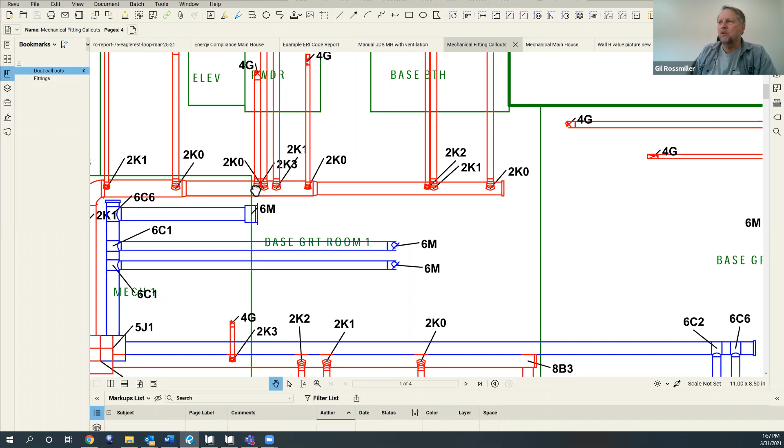How many are downstream of this one? This one is not good, but it's pointing to this one right here. How many are downstream? 1, 2, 3. Oh, isn't this fun? So I'm looking at all of these fittings here. There's another one that snuck in there. So I've got these 3 fittings. So I don't know anything more about them. So I can't see what's going on up here. Which one's the longest?

Yeah, good. That's okay, Tim. We're good.

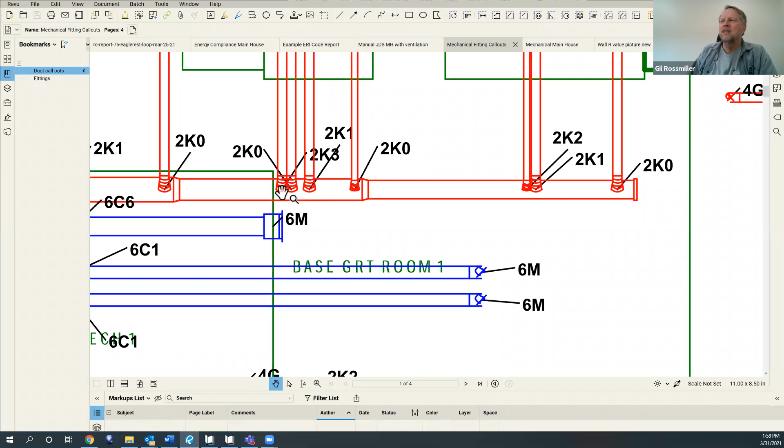Yeah. I'll tell you right now, which one's the longest? This one right here. First one. Because what's happening to the air? It's going right down to here and it's seeing this trunk reduction and it's now repressurizing and the air comes back. So this one's the shortest, then the next shortest, then the next, and then that one. This one here, look. That's why trunk reductions here are so important. If they're showing a trunk reduction, it makes a big, big deal.

Outside air, combustion air for the water heater. What that is in the ventilation piece. And so when you're looking at the ventilation piece of it, it's looking at 3 different things when it's calculating the central vent. Okay, a good question, Cornelia. It's looking at how much unconditioned air you are bringing in. It's looking at the volume of the home. It's looking at the combustion air, because this is something that happens in the background. It's something that the designer will input into it. You just don't see it. There's no report for it.

Okay. So it calculates the largest CFM from combustion air requirements, the number of people, or 0.35 air changes per hour based on the volume of the home. Okay. Yeah. It looks at all 3 of those. And whatever the biggest one is, that's what it uses. So that's the explanation on that.

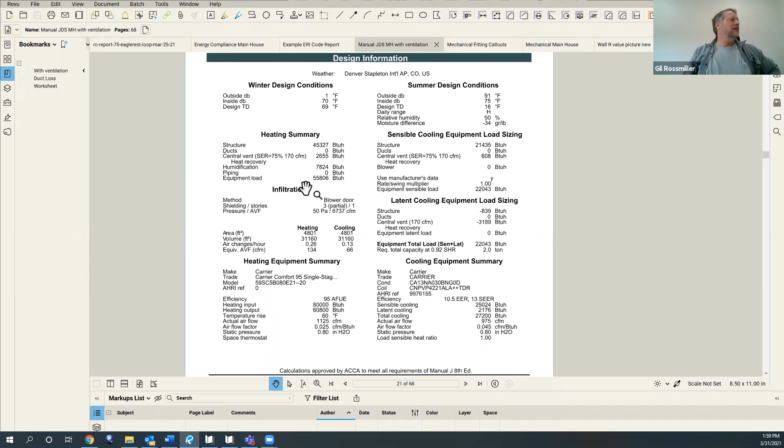Okay, so what else? Because we got a couple of seconds here. Anybody got anything else they'd like to chime in on? Gosh, I don't know. What else? What do you want to look at? Anything you see on here that I didn't explain that you want to learn about? I know it was so quick. An hour is so quick.